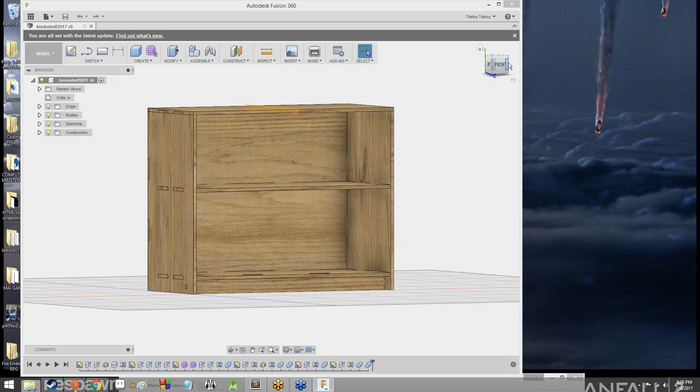Okay, so I got my bookcase up. So here's the deal. What we're going to be doing is we're going to be utilizing the tabs that we already have to create holes in the parts of the bookcase where the tabs are supposed to slot in. And let me show you how exactly you're going to do that. So what I'm going to do is I'm going to go up to Modify and then Combine. And as you can see, the Combine menu is pulled up again. Here's all of our basic stuff that we've looked at in the past.

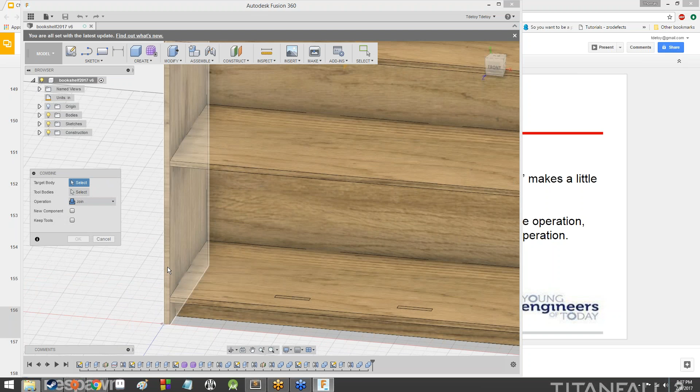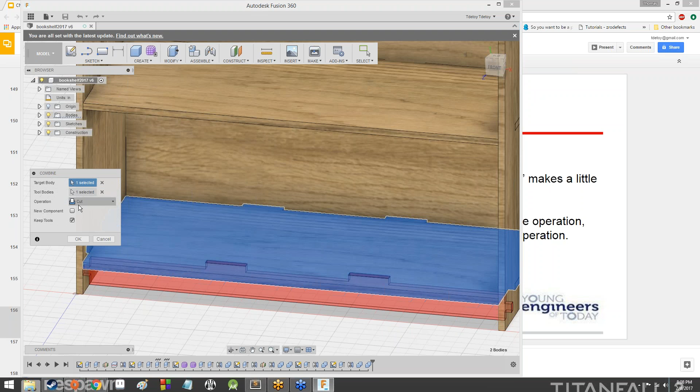So target body, I'm going to go ahead and select this bottom shelf. Tool body, I'm going to select the kick plate. Then I'm going to select cut. And finally, I'm going to check keep tools. That part is important. We want to check keep tools. So I've got the bottom shelf for the target body, the kick plate for the tool bodies, the operation is cut, and then keep tools is checked. And I'm going to hit OK.

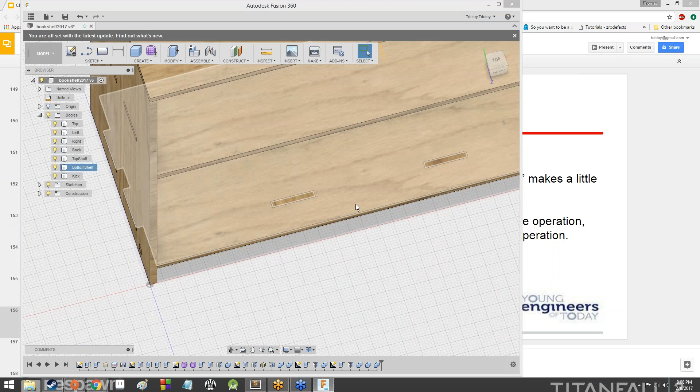And it looks like nothing changed, except if I hide the kick plate, you can now see that there are holes in the bottom shelf, and in fact, the exact size and dimension of the tabs for the kick plate. Also, if we zoom in, we see that there's no longer any sort of visual freaking out on that part, because that part of the bottom shelf doesn't exist anymore. So what exactly happened there? Well, let me go back into this menu so I can show you.

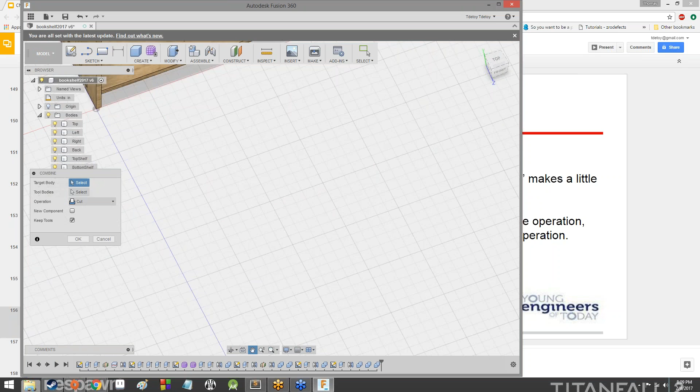Target body is the body that you're performing an operation on, in this case a cut. So we were performing a cut on the bottom shelf, but with what? Well, with the tool body. The tool body is the body which you're using to affect the change on the target body. Think of, you cut a piece of paper with scissors. You cut a design out of cookie dough using a cookie cutter. The cookie dough is the target body. The cookie cutter is the tool body. We are cutting slots out of the bottom shelf using the kick plate as our tool body. That's where the cut comes in.

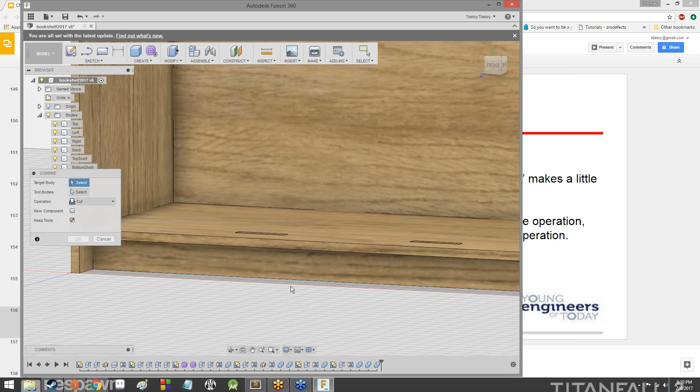Now, the keep tools part, that part is necessary as well, because normally what would happen is it would assume that we're not going to use the kick plate anymore, and it would just get rid of it. Delete it, goodbye. So we want to make sure that keep tools is selected, because otherwise, whatever tool bodies we use in order to perform this cut will disappear.

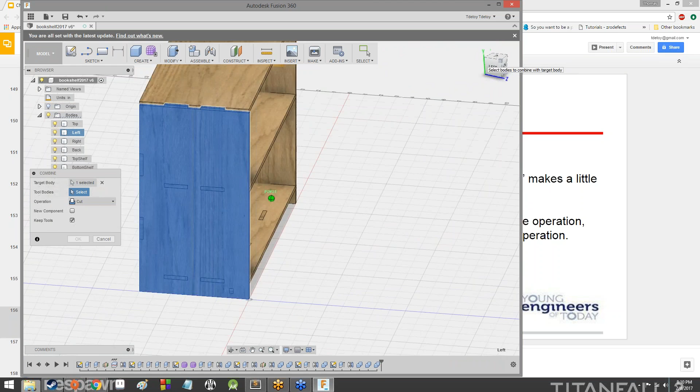Now, the thing is, you can only have one target body, but you can have multiple tool bodies. So for instance, I'm going to select this side wall here. Now let's take a look at everything that cuts into the side wall. We've got the back wall, we've got the two shelves, and we've got the kick plate. In fact, before I do that, I'm going to hit cancel.

I'm going to do a couple of things real quick here, because these parts are going to be important. I'm going to go up to Create and then Extrude. And I'm actually going to extrude some more of the bookcase a little bit further, because those will actually be necessary for increasing the stability of the bookcase.

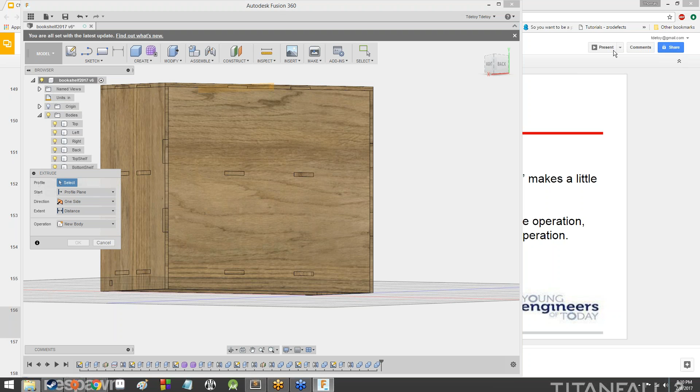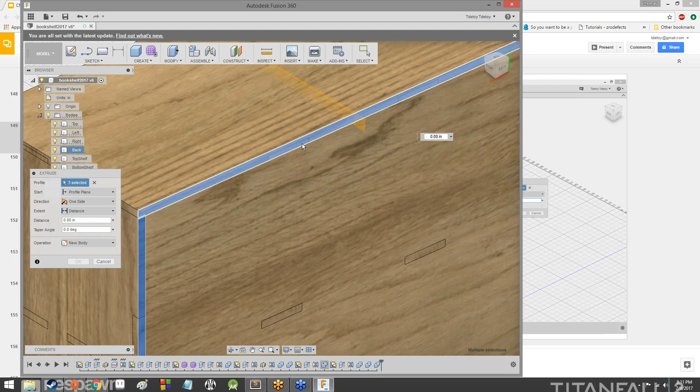So I've got the Extrude menu open. What I'm going to do is I'm going to select this back strip, and this back strip. Why might I be selecting those, you might ask? Well, as you can see, the tabs are actually on the exact plane that these different parts of the bookcase end on. So in that sense, they would just kind of lay into the back as opposed to sliding into slots.

What we're going to do is we're actually going to extend them out just half an inch, so that there's some overlap. And the reason for this, hit OK. Oh, good Lord. Let's extrude each part individually.

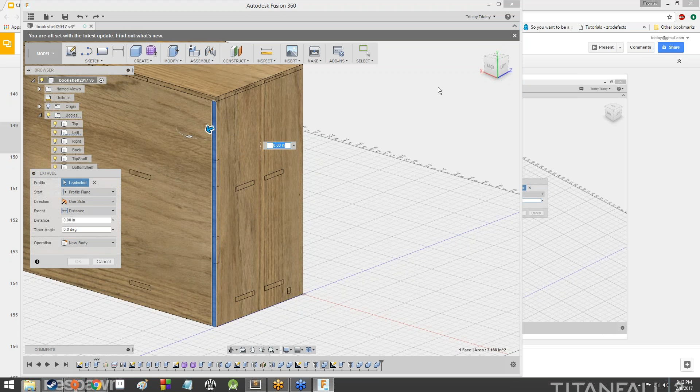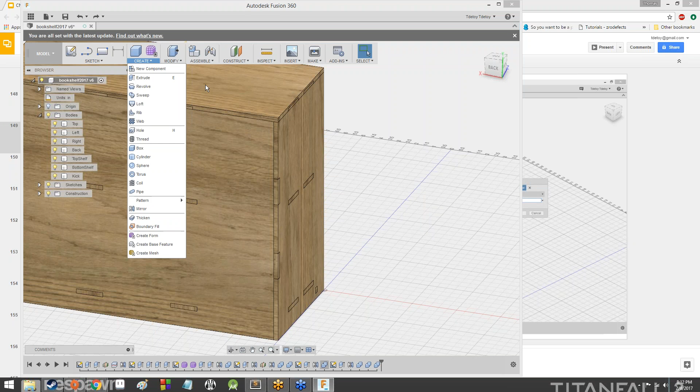Because, okay, so again, you notice how these tabs are exactly flush with the ends of the walls? Because we want to make sure that there's actually a slot and not just that they're going to kind of rest into the side of the wall. Because basically what we're doing is we're increasing the stability on the bookcase.

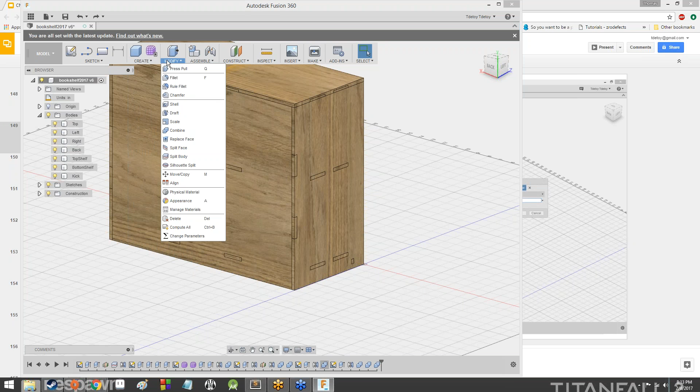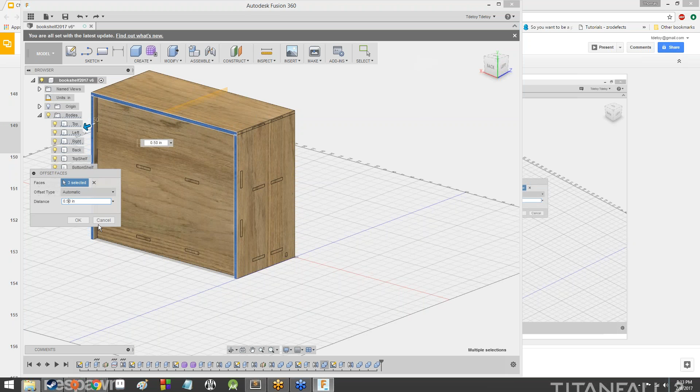So instead of extrude, we're going to go to modify and then press pull. And we're just going to pull these faces out 1/2 inch. I mean, you could, but that's not the point. The point is we're doing this without glue and screws. We're trying to make this so that you don't have to use screws when you're making the bookcase.

So as you can see, I actually used modify and then press pull and just brought it out 1/2 inch. So now those slots are actual full-on slots. They're not just, you know, sort of cuts out of the side of the bookcase. And I'm actually going to do the same thing to these faces up here along the top. We'll make that 2/10 of an inch.

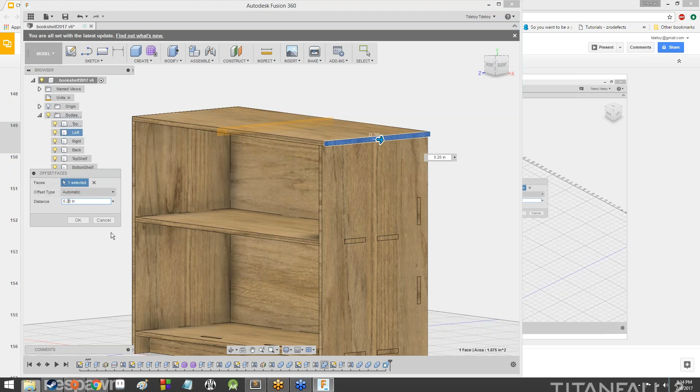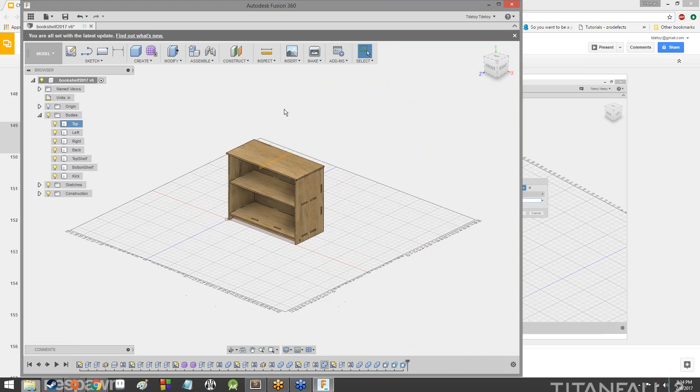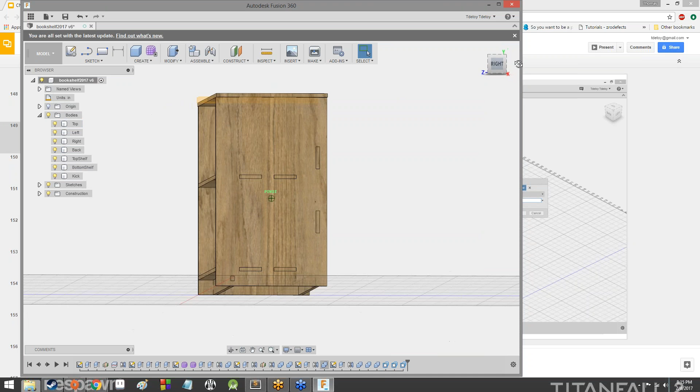Nothing amazing, nothing huge, but enough so that, oh no, let's do 1/2 inch. Let's do 1/2 inch on either end. Boom. So now, as you can see, there's some overlap on the entire bookcase, which is what we would like to have. This will help make the bookcase stronger.

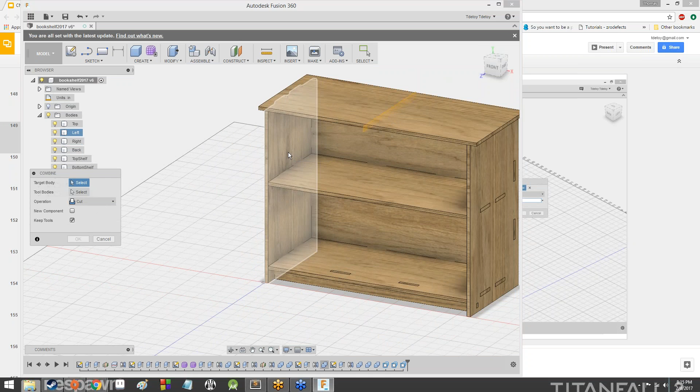Cool. So now that we've done that, now we're ready to put holes into the side walls. So again, we'll go back to modify and then combine. Again, you want to make sure that keep tools is checked, and you want to make sure that cut is selected as your operation. And for your target body, we're just going to select this side wall. And then for tool bodies, we're going to select everything that cuts into that side wall.

So it's going to be the back wall, the top shelf, the bottom shelf, the kick plate, because as you can see, all 4 of those objects have tabs that slot into the sidewall. And they're all going to turn red and kind of transparent to let us know that those are going to be our tool bodies. And then the blue one is going to let us know that it's our target body. Again, make sure keep tools is selected, make sure your operation is cut, hit OK.

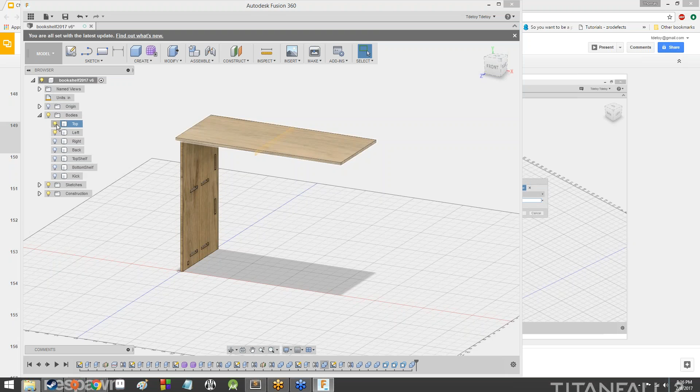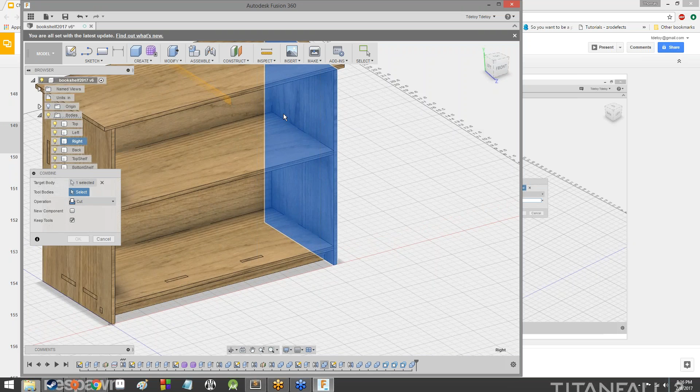And again, not much looks like it's changed, except if we hide everything else. Look at that. Our sidewall is a whole bunch of slots for our tabs. So I'll unhide everything. And I'll do the same with the other wall. Modify, combine, select the side wall for our target body, and for our tool bodies, select everything else that's gonna connect to it. Hit OK, making sure that our operation is cut and that we're keeping our tools, and verify that it is in fact, yeah, perfect.

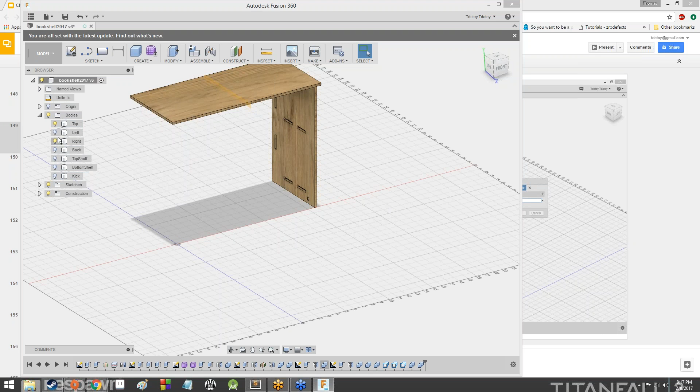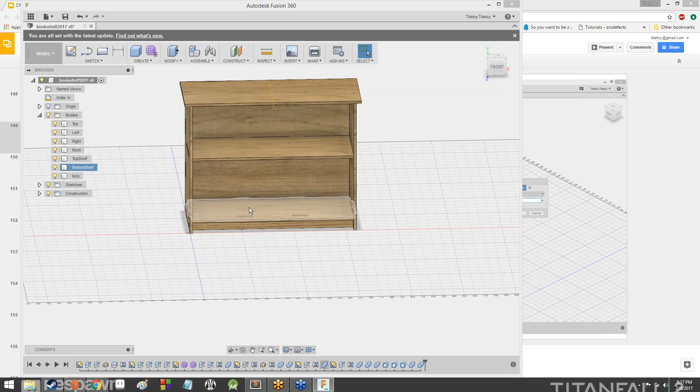So now we're making some serious progress here. What else have we got? Well, we've got the top. Nope, the shelf doesn't have anything. So the top shelf doesn't have anything that cuts into it. We already did the bottom shelf. So we just need to do the back now, which looks like it only has the 2 shelves, and we need to do the top. So let's go ahead and modify and then combine. Back wall, select the 2 shelves, cut, keep tools, OK. We'll hide the shelves to verify, yep, there are slots there.

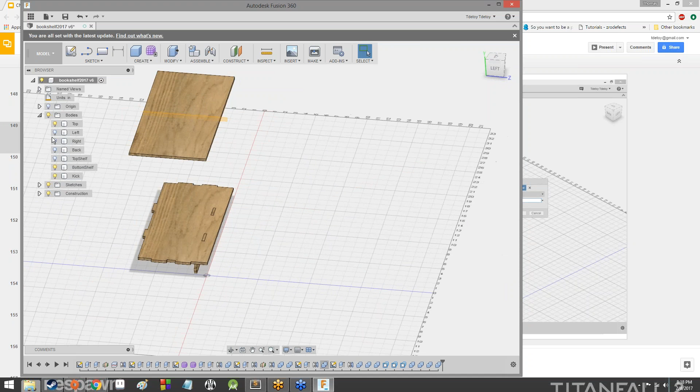And then we'll go to modify and combine one more time, and our target body this time is going to be the top. And now for the tool bodies, we're going to select everything that has tabs in the top. Cut, keep tools, OK. Let's verify. Looking in on the top, yep. As you can see, we've got some neat slots cut into it. And there you go. That bookcase is, in fact, complete. That wasn't so bad, right? It's pretty easy, in fact.

So, what now? Well, we can actually start nesting the, excuse me, I'm having a brain fart, the bookshelf into wood, if we were so inclined. However, I'm debating.

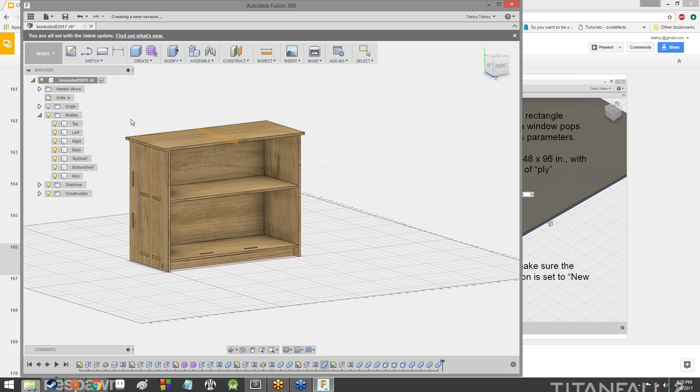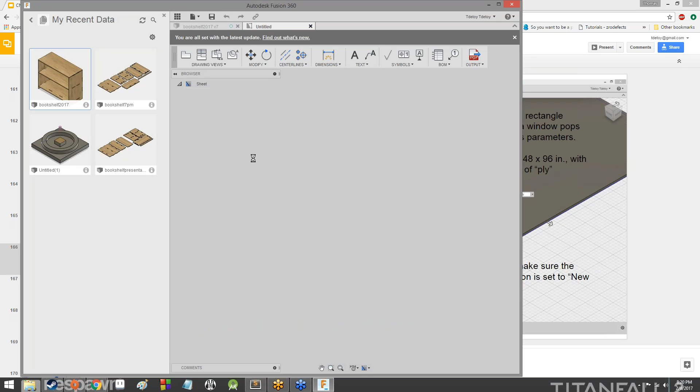No, that did not help. Oh dear. I've broken it. Everything's broken forever.

There we go, that wasn't so bad. All right, I'm actually going to copy it because I'm a fool. I'm going to hit copy.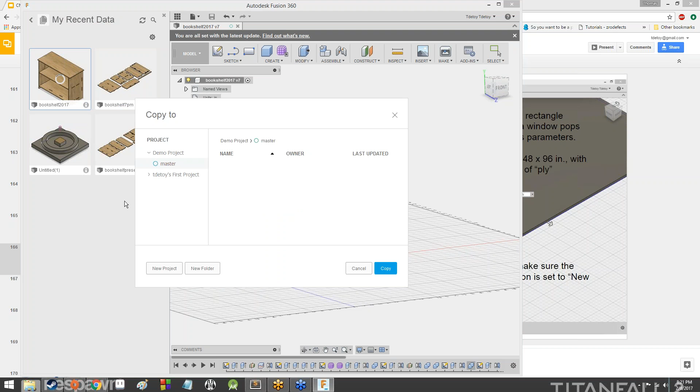And it's not going to do anything. Okay, why won't it? It's not making a copy of it. There we go, now I got 2 copies of it. Excellent, it just took a second to update.

So now I've got 2 separate bookshelves. We're going to keep one in the full assembled bookshelf form, and then we're going to flatten one out and turn it into a bookshelf set in some stock.

So again, in order to do what I did, go to the data panel and select the bookshelf, right-click on it and go to copy. It'll ask you to copy it to a place, then you just copy it to your project and hit copy, and it will spend some time. It'll take a minute to update, but it will actually show that you've got a second bookshelf. But we're going to keep modifying the one we already have.

Keep that copy for later. Give everybody just a couple of minutes to do that. Go ahead and raise your hand once you've gotten all of the tabs, the slots for the tabs, knocked out.

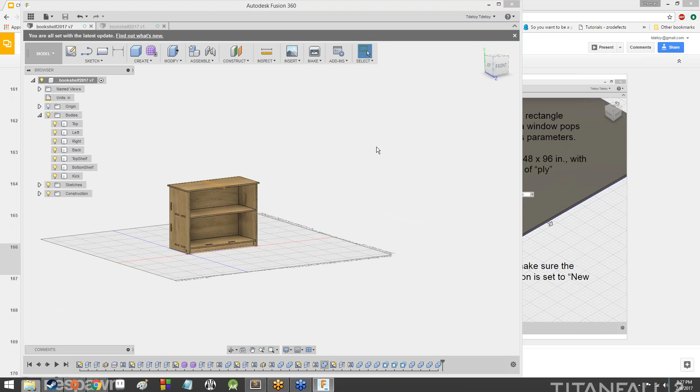All right, cool. So we probably have our copy of the bookshelf now.

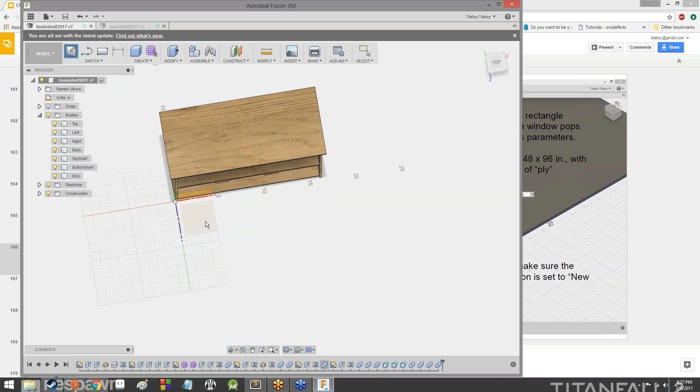What I'm going to do is create a new sketch, and I'm going to create it on the ground, this plane right here that the bookshelf is resting on. I'm going to click it, and I'm going to hide that body. And I'm going to draw a 2-point rectangle starting at the origin and going outwards. I'm not really going to worry about how big it is right now because we're going to dimension it out.

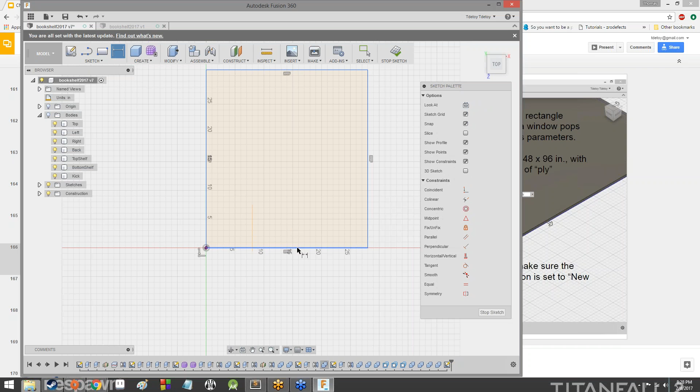The dimensions of this are going to be 48 inches by 96 inches, so it's going to create this nice long rectangle. Then I'm going to extrude it upwards a distance of ply. Hit OK.

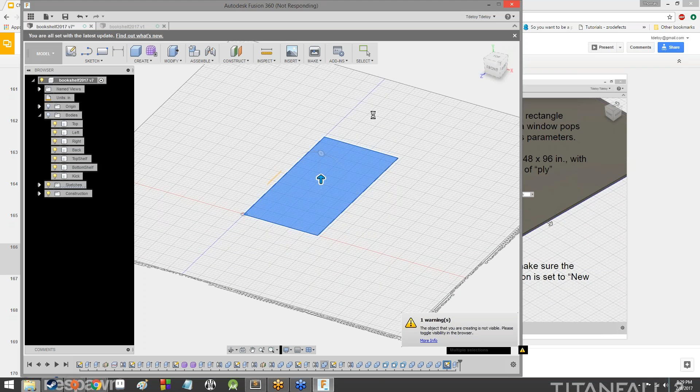And everything's going to freak out for a second, even though I really shouldn't be freaking out. And Fusion 360 crashed. Awesome. What happened? Oh, okay, unhandled exception, interesting. All right, well, close. We'll try that again.

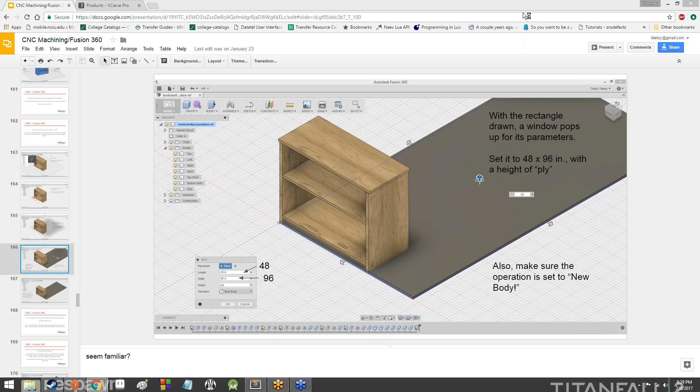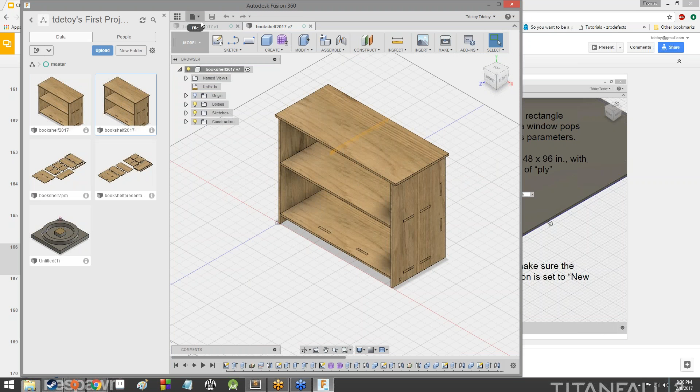Well, it opened up a lot more quickly that time. That's nice, at least. Let me just go ahead and open up one of these. Hopefully this is the one. Maybe it's this one, I don't know how far it got into the process before it decided to flip out. Okay, it looks like neither of them actually... Okay, so it can be either one. Hey, so that's good, so I can show the whole process over again.

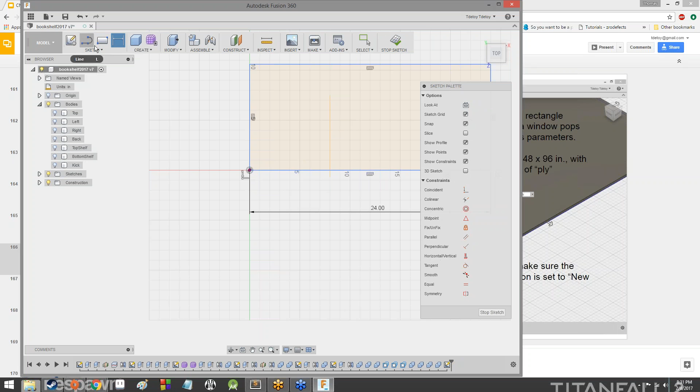I'm going to create a sketch on the floor. I'm going to hide all of the bodies of the bookcase. Create a 2-point rectangle and dimension it out to be 24 inches by 48 inches. And when that's done, I'm going to extrude it a distance of ply. Hit OK, unhide all of the parts of the bookshelf.

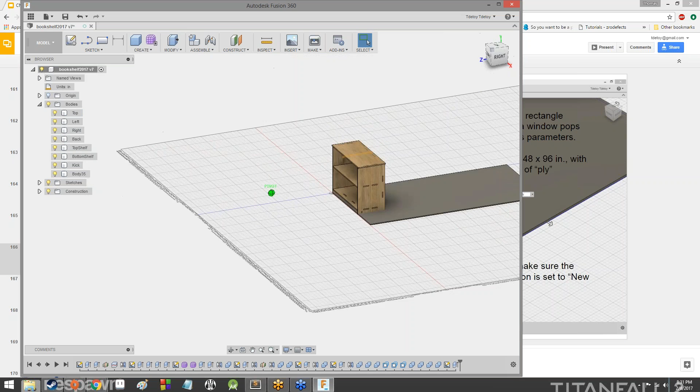So now, as you can see, it's just kind of floating in this gray rectangle. This gray rectangle represents the wood that the bookcase will be cut out of. You might be wondering what the point of that is, but you'll see. This is going to be the stock that the bookcase is cut out of.

So now we need to turn all of the bodies that we have for the bookshelf into components.

And basically, the components are going to help us give a little bit more functionality to this. They're going to make it a little bit easier for us to do what we're trying to do here.

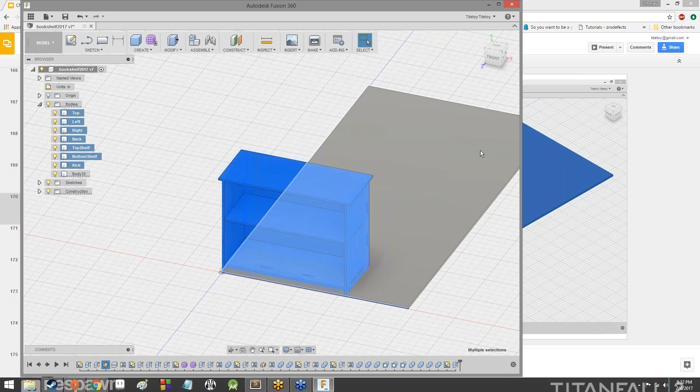So what I'm going to do is select everything, just drag select, including the stock. We know everything's selected by the fact that it is all highlighted. Okay, there we go.

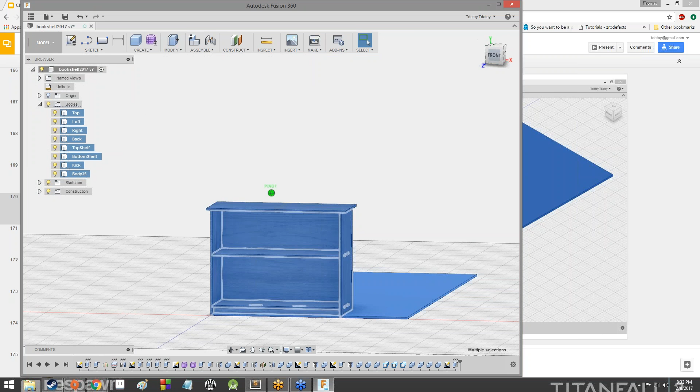So we got everything selected. I'm going to right click and select create components from bodies. And then everything got moved out of the bodies category in our browser. So now we got component 1, kick 1, bottom shelf 1, top shelf 1, back 1, right 1, left 1, top 1. And of course, component 1 is our stock. That's the reason why it doesn't really have a useful name, because we didn't name it before we turned it into a component. It was 24 inches by 48 inches.

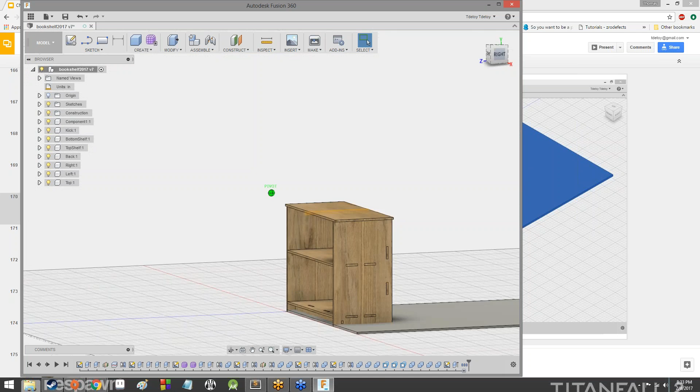Hopefully that should be enough room to place everything down onto it, but I think it should be. I'm pretty sure it should be.

And I'm just going to hide everything except for our components, our sketches, and our construction parts things.

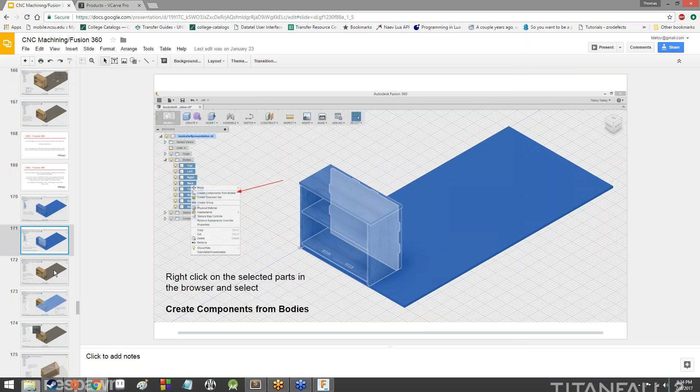That sounds... Oh, that was the door. That's what that was. Now the place is just haunted.

Okay, so now we've gotten all of our components created. I'm going to right-click on the stock that we have down here. Okay, it's not selectable from there. Okay, you think, yeah. I'm going to right-click it on the browser, in fact, and I'm going to select ground.

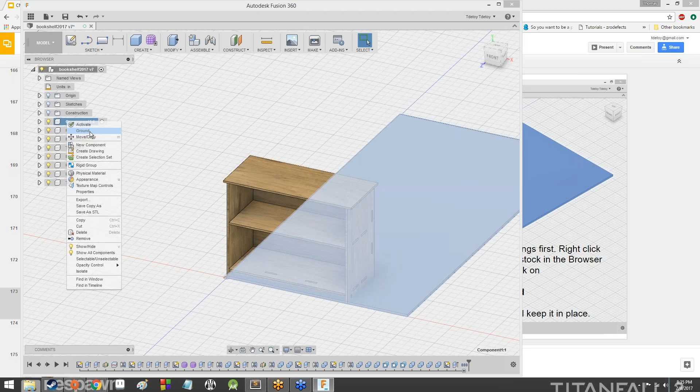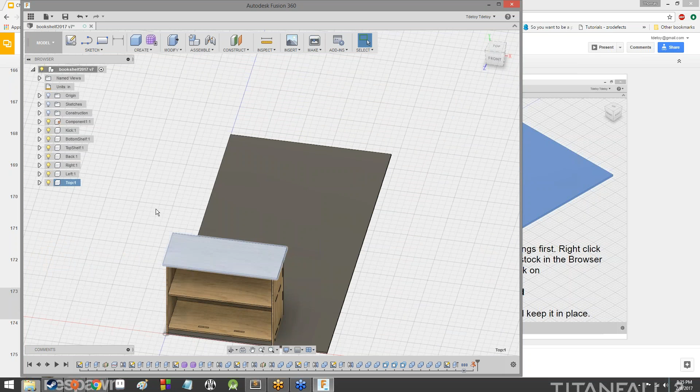And what that does is that keeps this in place so we can't accidentally move it around. We can't just make it fly around everywhere on accident, which is exactly what we want. We want the stock to stay exactly where it is, because we're going to be moving everything else. See, I can just click and drag this. Can't do that with the stock anymore.

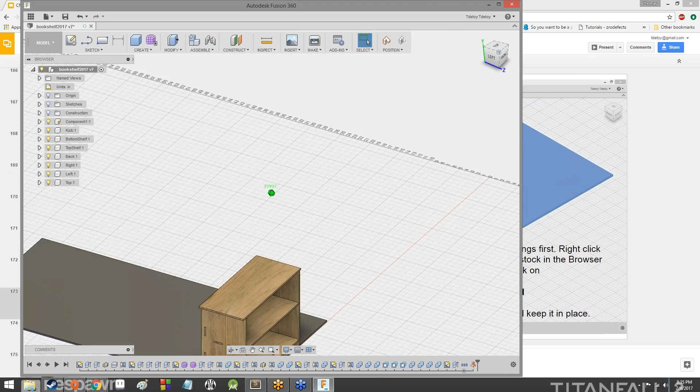And I'm pretty sure that's not where it's supposed to go, but that's okay. It's not really going to be a huge issue, because we're actually going to be moving everything onto the stock.

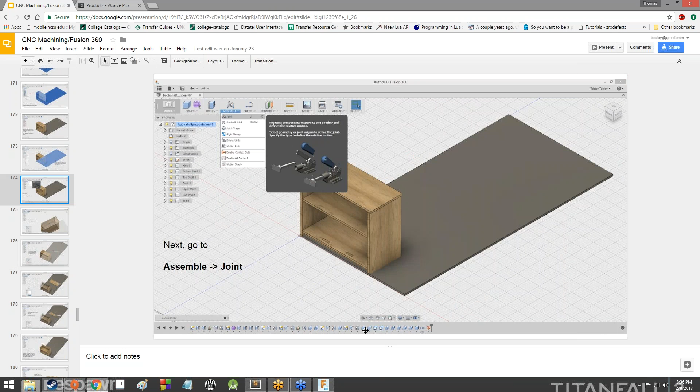Oh, yes. This is an interesting part. So now what I'm going to do is go to Assemble, and then Joint. As it describes here, it positions components relative to one another and defines the relative motion.

We're going to continue in previous position. It's going to ask us to select our first component. We're actually going to select the top of the bookcase, except very specifically the bottom face of the top of the bookcase. If you mouse over the center, you get this weird symbol, like a half moon inside a circle. That's actually exactly what we want. So I'm going to click on that.

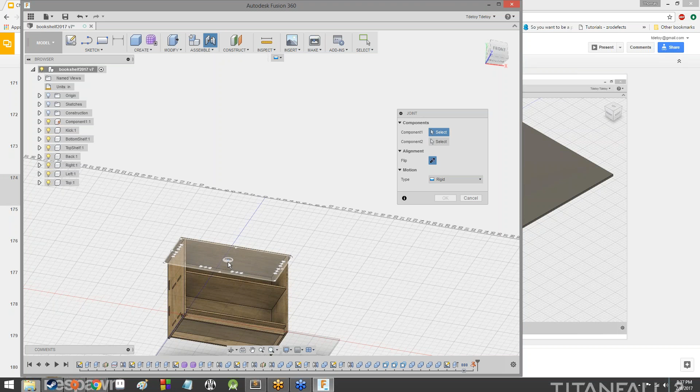And then I'm going to get the same symbol when I mouse over the center of the stock. So I'm going to click on that. So we want the top of the stock and then the bottom of the top of the bookcase. I click on that, and then it's going to kind of wiggle around, and it's going to sit there.

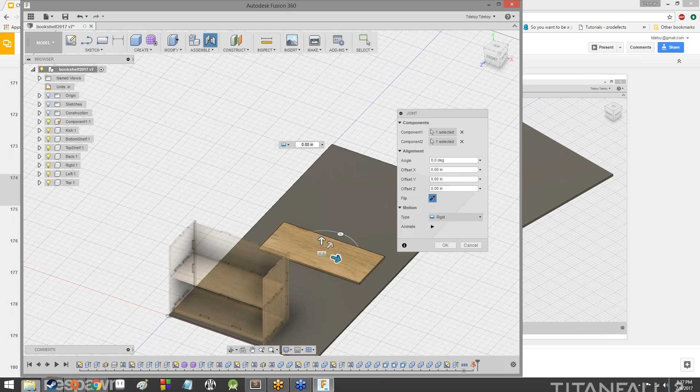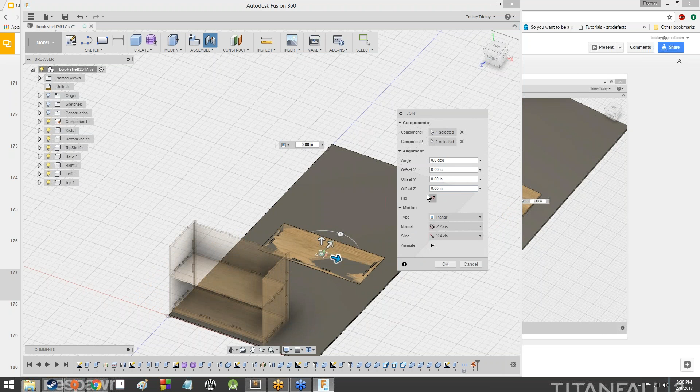And it should have flipped over, but alright, so now under motion type, instead of rigid, we're going to select planar, and it's going to fly around. And then we're going to deselect this flip option right here and see how it's sort of sitting in there.

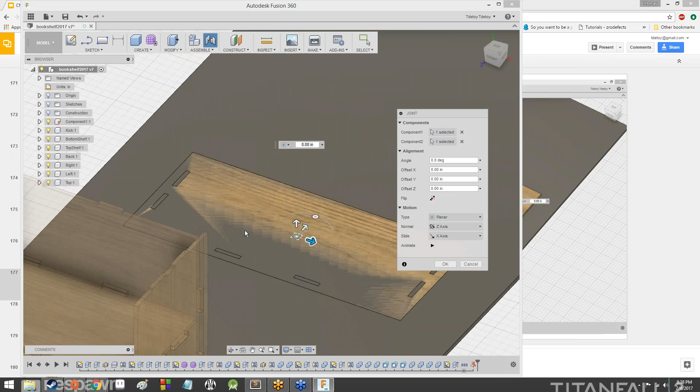And when I zoom in and out, I get the crazy Z fighting. That's how we know it's sitting on the exact level of the stock, and that's perfect. So now we know that that's embedded into the stock. We hit OK, and we can move this around, and it will stay embedded exactly in the stock, just like we want it to.

It can be a bit of a pain to make sure it's selected, though. I'll go ahead and drag this over here into the corner. And actually, we're just going to do this with each of the parts of the bookcase.

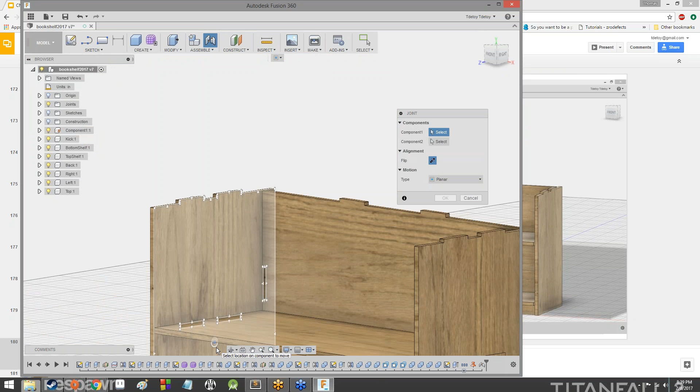So I'll go up to Assemble, then Joint, and Continue. Yeah, I should have done Continue originally. And I'm going to select the inside wall, the inside of the left wall. Again, you want to make sure that you get the center of it. You notice that there's a little blue square there as well. That means I've got that selected. That's great. I'm going to go ahead and click there.

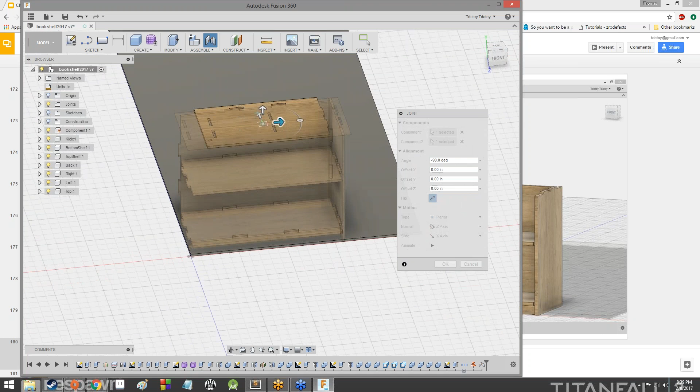It's going to turn transparent. And then just like before, I'm going to select the top of the stock. Boom. It's going to flip around, start flying around on the board. And I'm going to click the flip again to make sure, then hit OK.

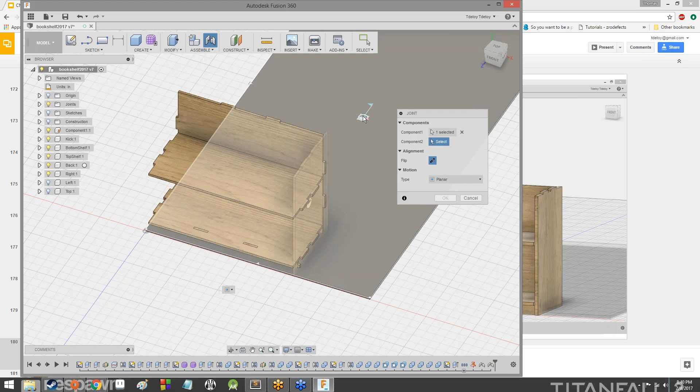Do the same thing, Assemble, Joint, select the inside of the right wall. Select the center of the, let me go ahead and hide the top and the left so I can select that. Flip it, it'll be embedded in. Go ahead and hide the right.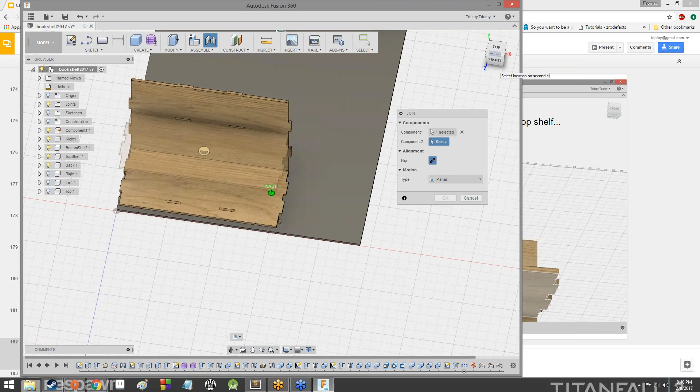Then we'll do Assemble and Joint. Use the bottom of the top shelf and the top of the stock. Let it do its thing. It's just so ridiculously silly looking. Flip it and hide it. Hit OK.

Assemble, Joint, the inside of the back wall, the top of the stock. Flip it, hide it, OK.

Underside of the bottom shelf. This one's a little bit tricky sometimes. So I'm going to hide this. Assemble, Joint.

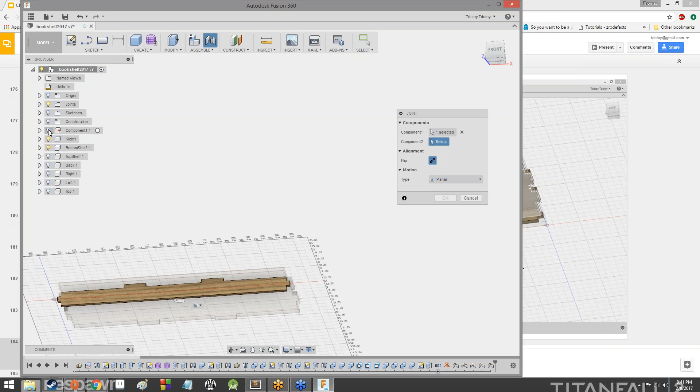It's using an algorithm to basically detect all the possible movements as a joint across the component, and the ideal sort of location. Flip it, hide it, okay.

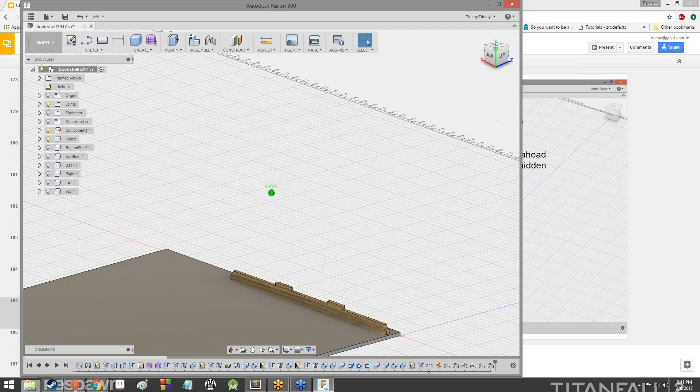And then the back of the kick plate. So we're going to rotate this around, assemble, joint, back of the kick plate, top of the stock, flip it, okay.

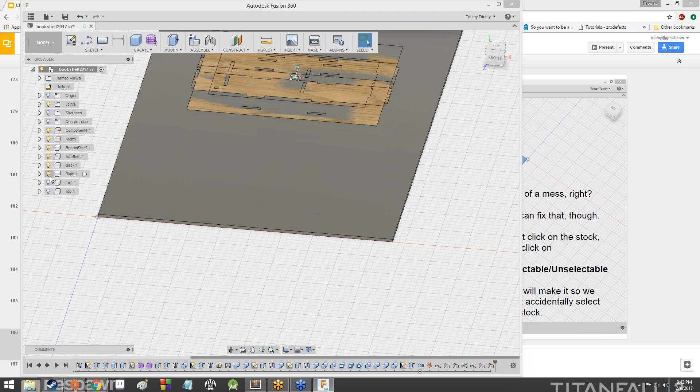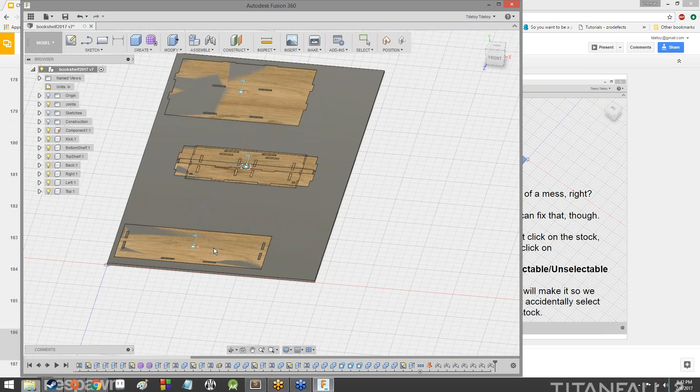So now if we unhide everything, it's all hiding in, or embedded into the stock right now, which is a great start. Now what we're going to do is move this stuff around so that it is all separate from one another, but still embedded in the stock.

Let me go ahead and hide the stock real quick so I can move this stuff individually. Now you can see we got all the individual parts of the bookcase. Only problem is, bring the stock back, it's kind of difficult to get everything placed so that it's all embedded within the stock.

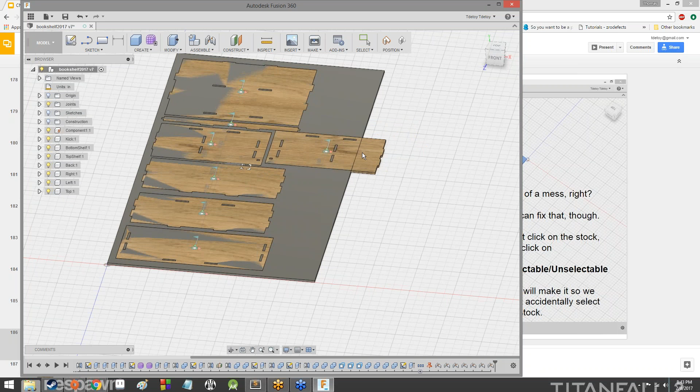Now we can do some wizardry here and there, move these a little bit closer, and we can sort of stuff that in there, and this can go right there. But we're still left with this one. This one doesn't fit here. So instead what we can do is...

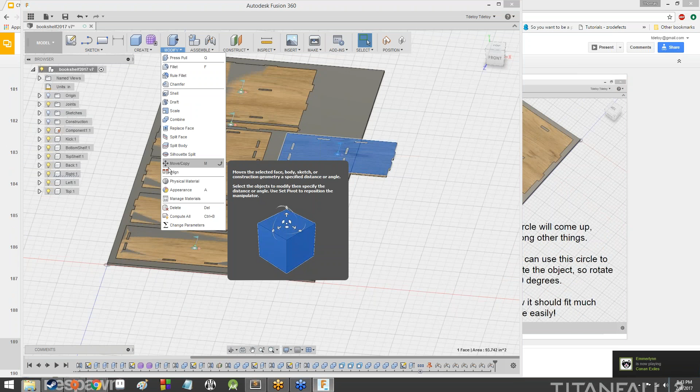We can go to Modify and then Move. And it brings up this weird looking little display here. Each one of these are rotation circles that you can use to rotate it. So we're actually going to use this one and rotate it 90 degrees.

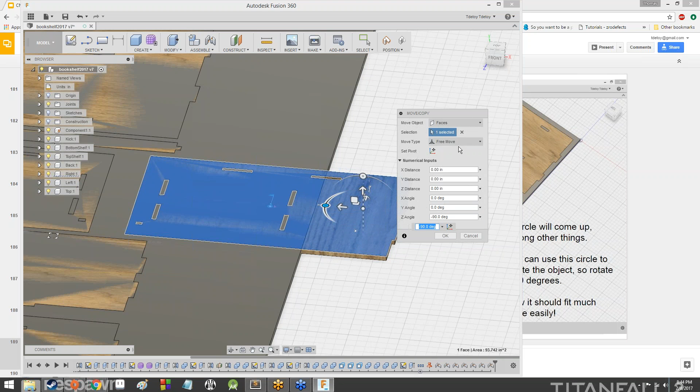And that was weird, it just rotated the texture on it. Oh, it rotated the face. We want to select the component here and rotate the entire component 90 degrees. There we go. So now we can hit OK, and we can move this component someplace where it will work.

Also, you can make your life easier by right-clicking on this and selecting the option labeled selectable/unselectable.

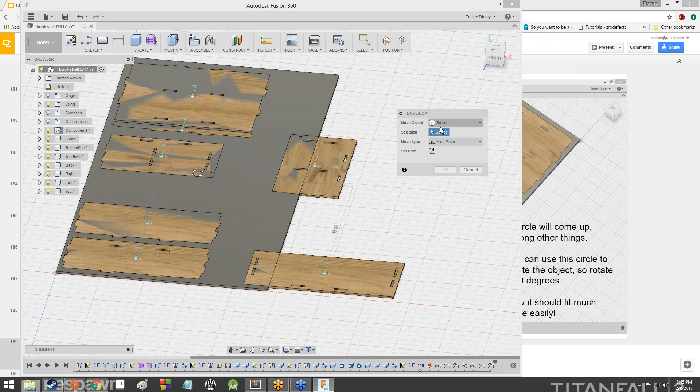All right, so basically this just involves messing around with everything until we can find a satisfactory setup.

Which might be a bit of a challenge, but I believe in you guys.

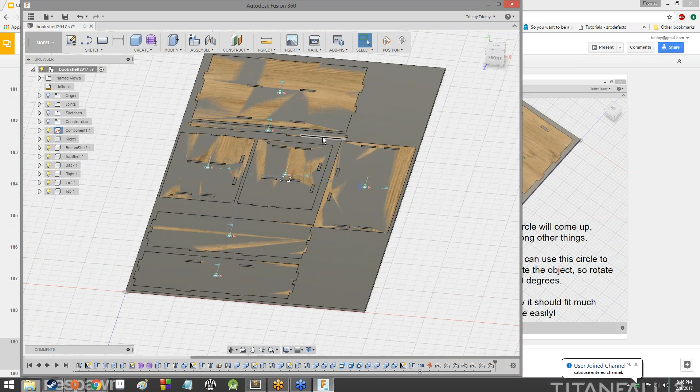And there you go. That gives us the relative size of our stock to our entire bookcase.

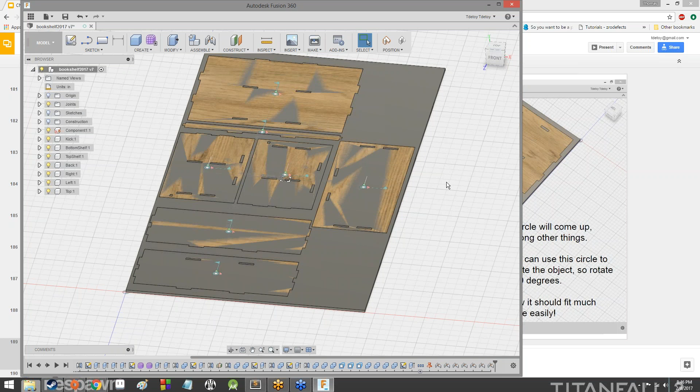Now all we have to do is hide the stock. And this gives us our bookcase design for use in CAM.

And that's it, that's a completed bookcase design. Now, again, there are more steps involved, like going into the CAM software and setting up the cuts and everything like that for a CNC machine.

However, we've done like 90% of the work at this point. The rest of this is just sort of setting up options and making the computer do what we want it to do, which can be a bit of a struggle in and of itself, but it's not going to be as much of a challenge as it was getting this set up.

Hopefully, at least, probably, more than likely. So there you go, give yourself a pat on the back. You fully modeled a bookshelf in Fusion 360 that is fully constructible.

Yeah, no, again, no worries, Cohen. Like I said, we'll spend some time after class trying to get yours up and running properly, and then you can just view the video later.

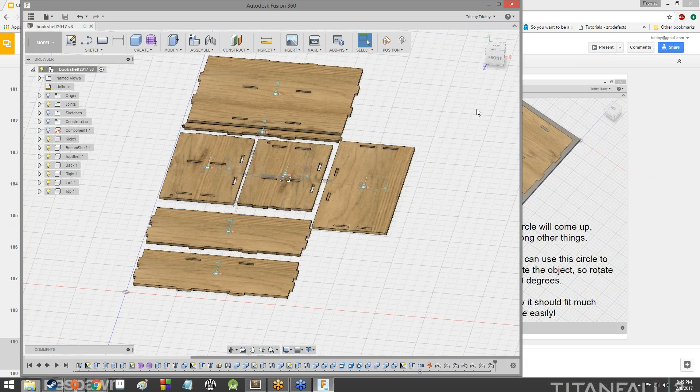This is true, different degrees of infinity though. And then, I'm being facetious, but anyway, we'll break for the weekend.